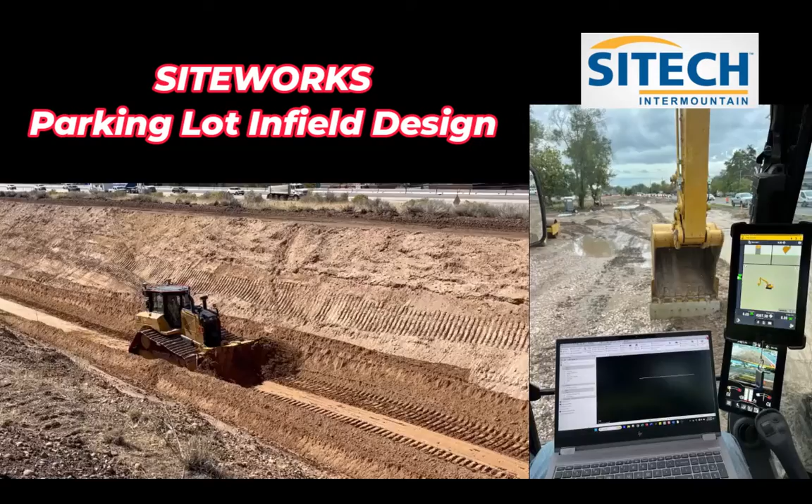Today we're going to simulate an infield design of this parking lot. We're going to go and shoot all the lips of curb and concrete and create a new surface for us to come in and grade this.

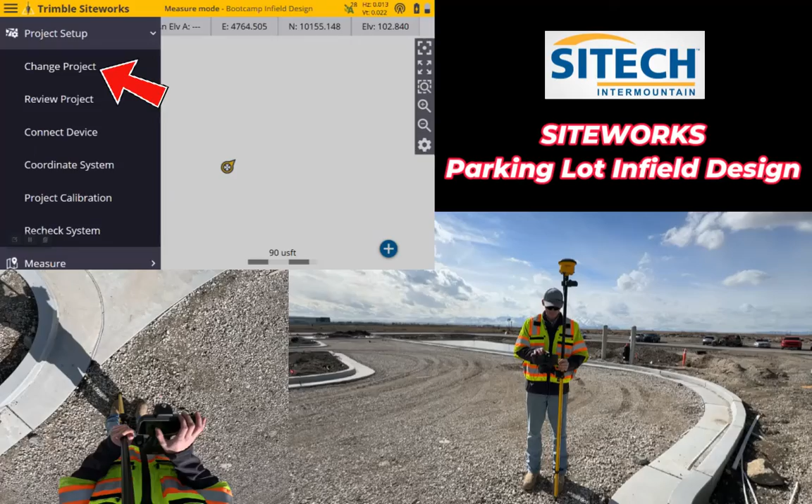So we'll start off by starting a new work order for this. I'll come up to my hamburger menu, under my project setup tab, change project. I've got this new work order called parking lot started. Hit accept on that, get that fired up.

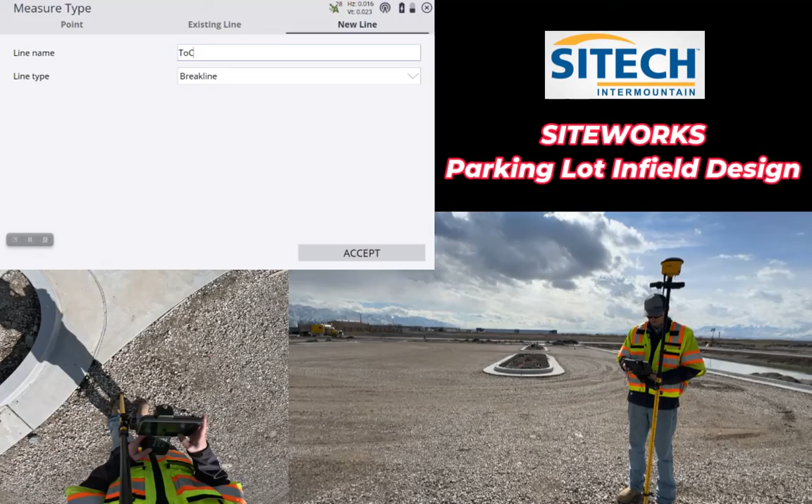Then I need to configure a new line string to start this on. So I'll go into my roller stuck in the mud icon here, switch over to a new line. I'm going to make sure that's a break line because I want that surface data to come in, and I'm just going to call this toe of curb, or TOC. Hit accept. Now I'm ready to start measuring that.

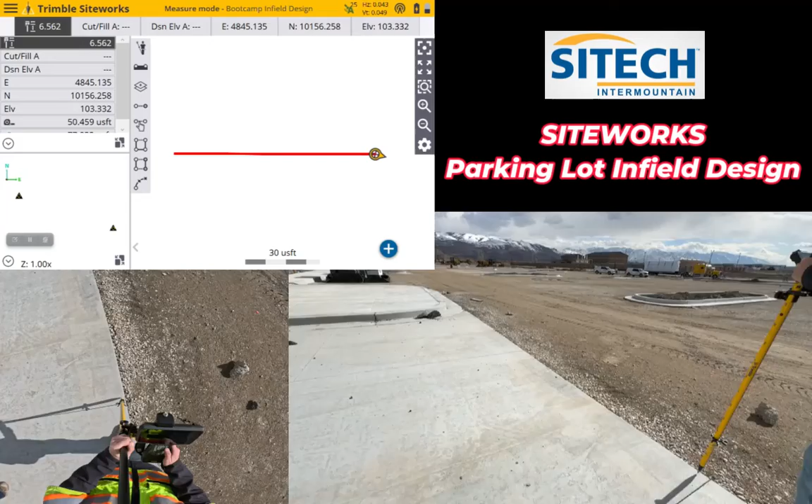So I'm going to square myself up over my bullseye here. Start right here on my concrete and start measuring this in. We want to hit every so often along this concrete edge. Anywhere we have any grade changes, especially along the curb line, if we've got grade breaks or grade changes, we want to make sure we shoot those in so our surface comes in as accurate as possible. This concrete right here is pretty flat, pretty smooth, consistent, so I'll go a pretty long distance. Get all the way down to where it meets up to this curb line.

I'm just going to continue measuring this same line out into my curb. Then I'm going to come up to this corner, make sure I get one at the start of my arc, one in the middle of my arc, maybe another one so it makes a nice good circle for us, and then back into my straight section, and then down here to my corner.

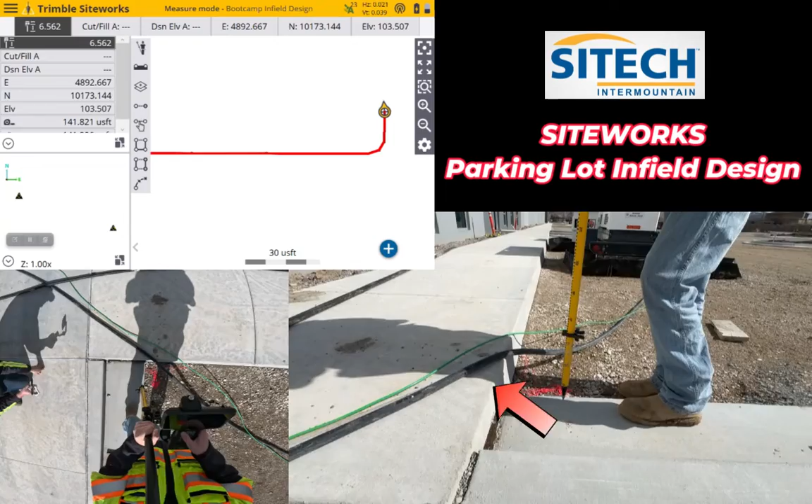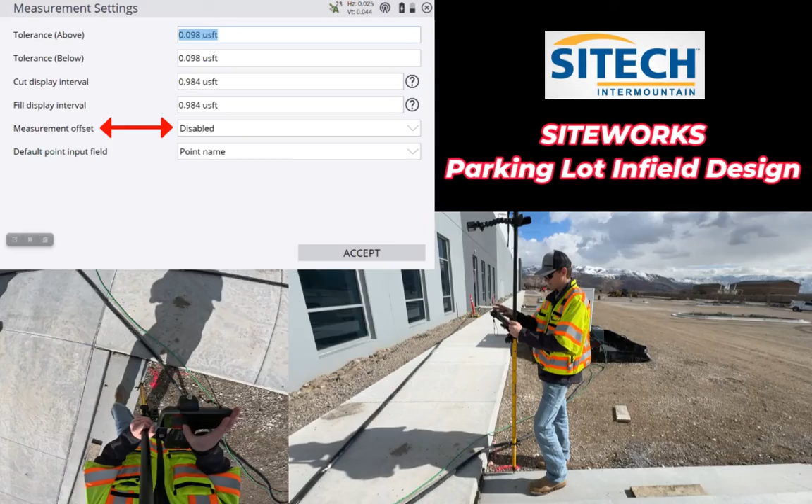Now you'll notice I have a 6-inch rise here to my sidewalk. I'm actually going to stop measuring this current line, menu, measure. I'm going to turn on a setting that gets turned off anytime we create a new work order - it's an elevation offset. To turn it back on, I'll hit my menu, come down to settings. Under settings we've got two measure settings, but we've got measure mode and then another one that just says measure. The second option from the bottom, this measurement offset, is disabled. We just need to enable that, hit accept.

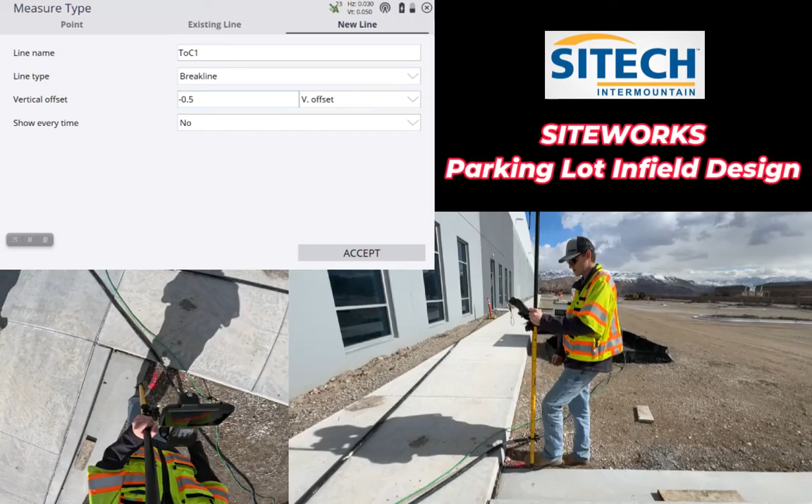Then I'm going to come back into my roller stuck in the mud icon, and you'll notice I have a vertical offset option in here now. So I'm going to do a minus 6 inches, a negative 0.5, because I've got a 6-inch show here. I'm going to hit accept on this new line, and I'm actually going to measure on the top of the concrete up here, but it's going to move my elevation 6 inches lower so it matches my curb line. So I'm going to start this line string here, measure all the way across.

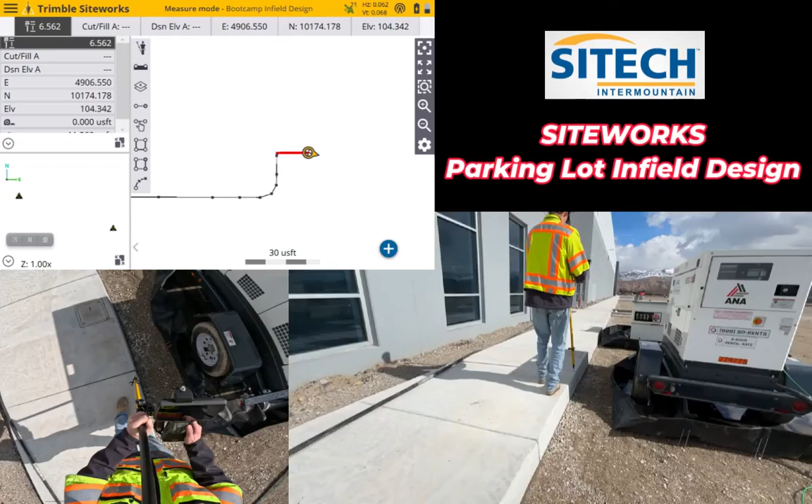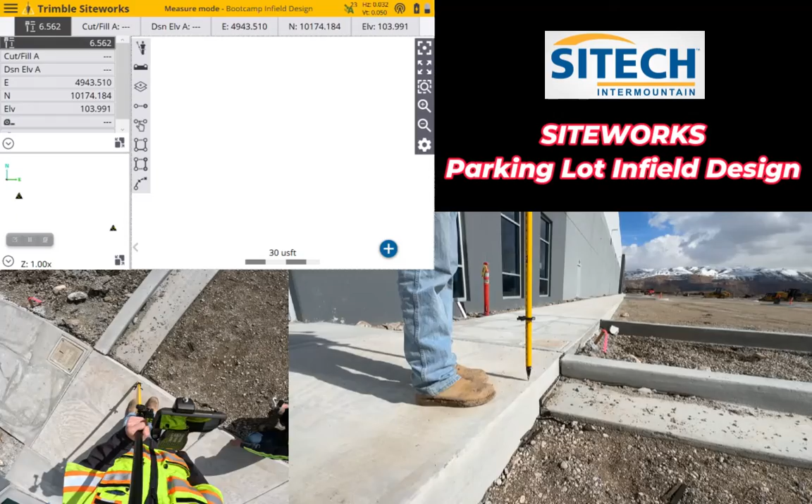Measure all the way across to this other curb where I want it to meet up again, take another shot just here, and I'm going to stop measuring that line. Again, menu, measure. I'm going to come back into my rod stuck in the mud icon and want to set that vertical offset back to 0 so that when I'm measuring this curb line it doesn't add an extra 6 inches to it that I don't want. So set that back to 0. I'm going to step down to my lip of curb and go ahead and start measuring all this in.

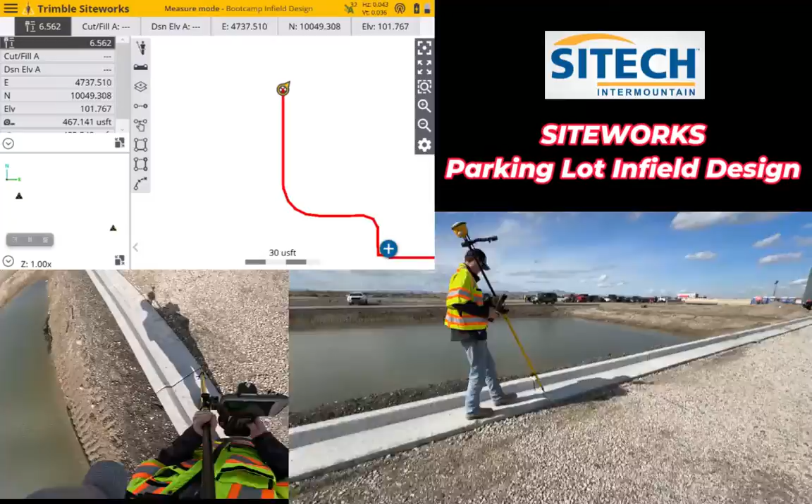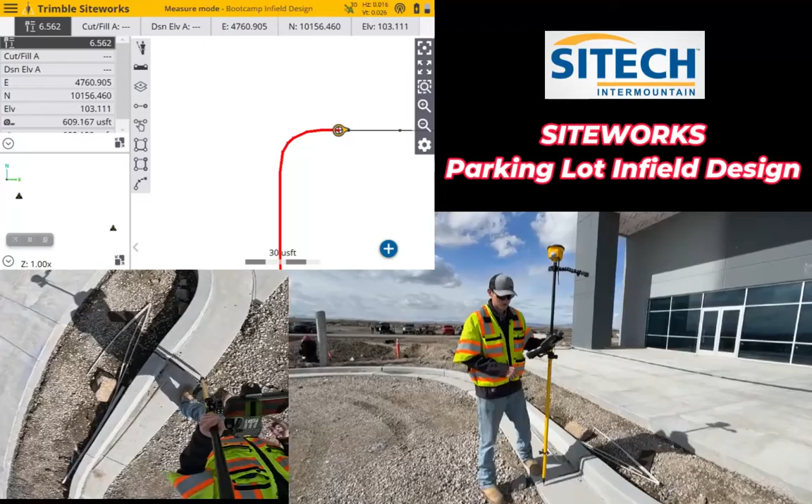Okay, so now that I'm back to where I started, I don't want to take another shot that would overlap this one - that would be two different elevations potentially. So I finished up this outer edge. I'm just going to stop measuring this line.

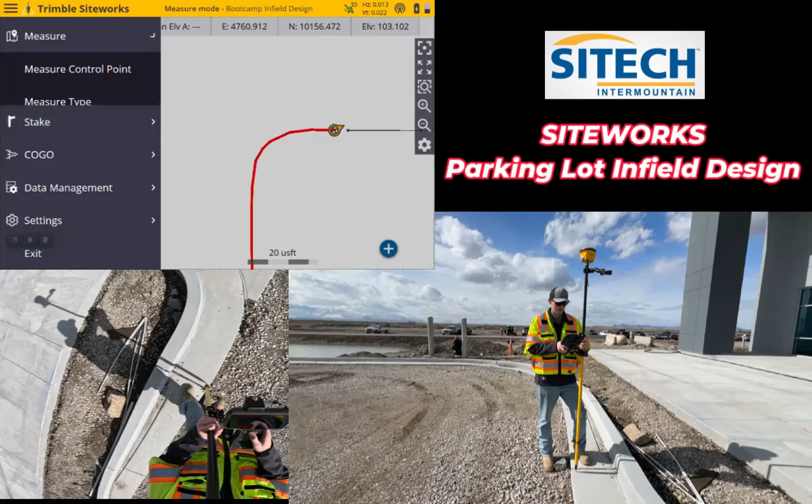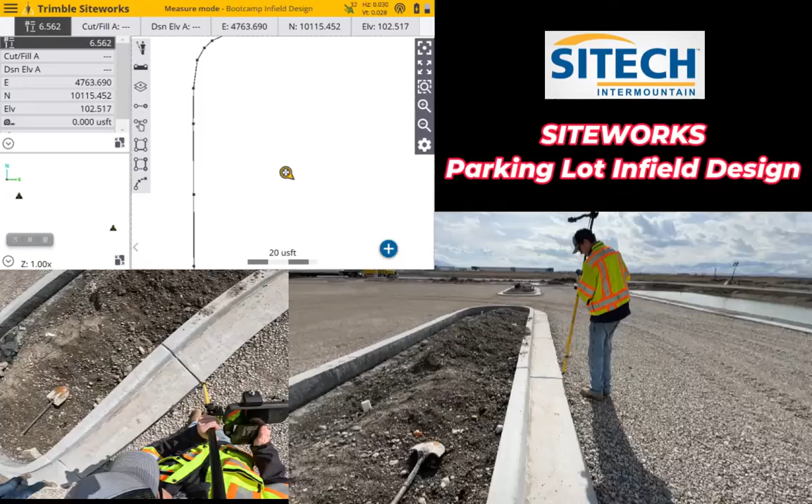Menu, measure. I'm going to leave it as a break line, and I'm going to immediately jump into these islands and start measuring these in. So I'm just going to start from this inside edge, and I'm going to start a new break line again. We can have it named the same thing, toe of concrete, toe of curb. Make sure it's a break line, and I'm going to start measuring this in.

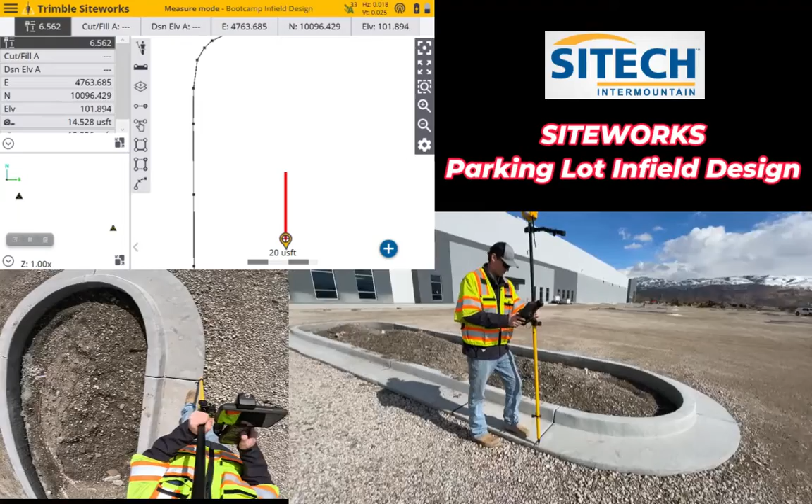These straighter sections, as long as they don't have a bigger grade break, we can jump pretty far. But these rounded edges, we want to be really precise about getting a couple of shots through the radius so that it comes in nice.

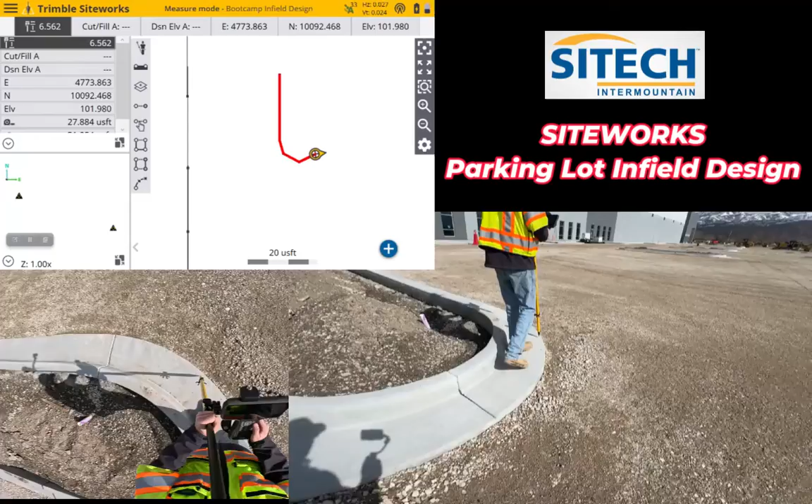And back into the straight section. I can stretch out these measurements a little bit more.

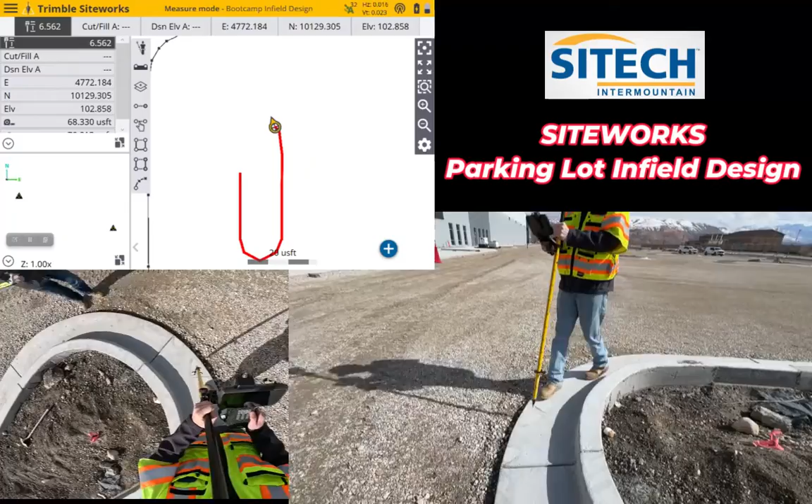And then I'm going to take one right as my arc starts. Maybe one in the middle of my arc. Maybe up to my joint. Middle of my arc again. And then back down to my straightaway.

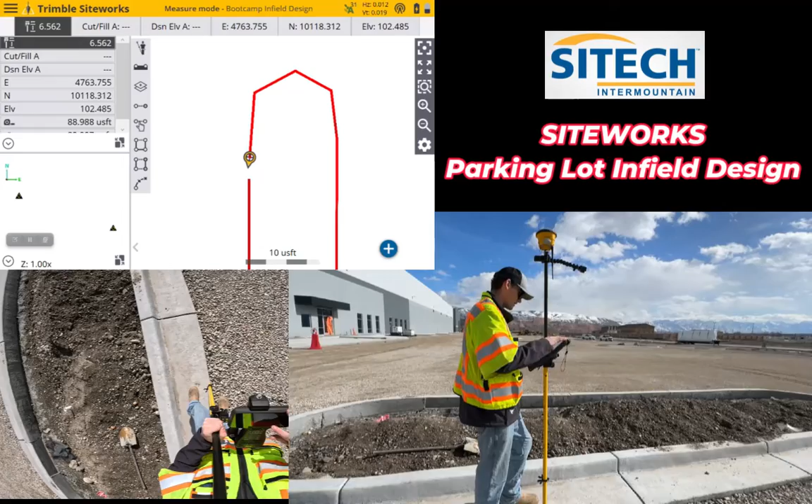Now I don't want to overlap these two points, so I'm going to use this little icon on this gray taskbar. It's the third item from the bottom, the second square up. It's got three solid lines and a dotted line across the top, and that's going to close out from where I finished to where I started.

So now I have a solid loop. So now I'm going to go around and apply that same thing and get the rest of these islands in.

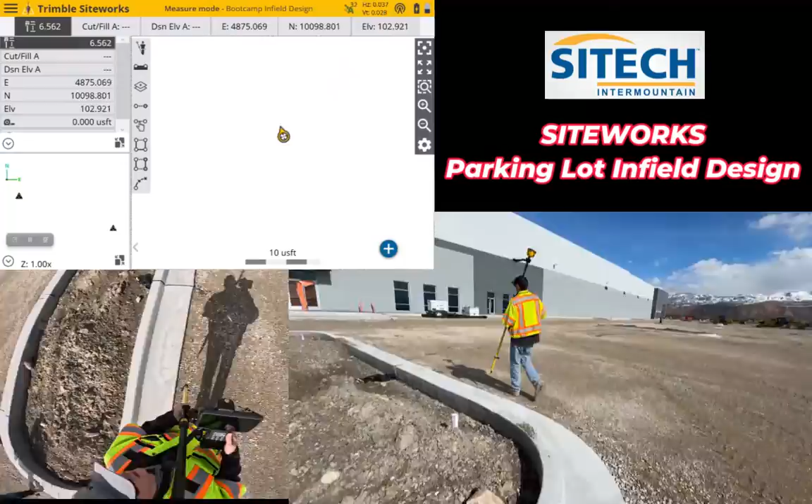So in a lot of cases in the real world, we'll have drain boxes, grade breaks that need to happen and cross our parking lots. In this case, we just have a big giant sheet drain that's going down to our catch curb. But we're going to simulate on a job site that would have a drain box.

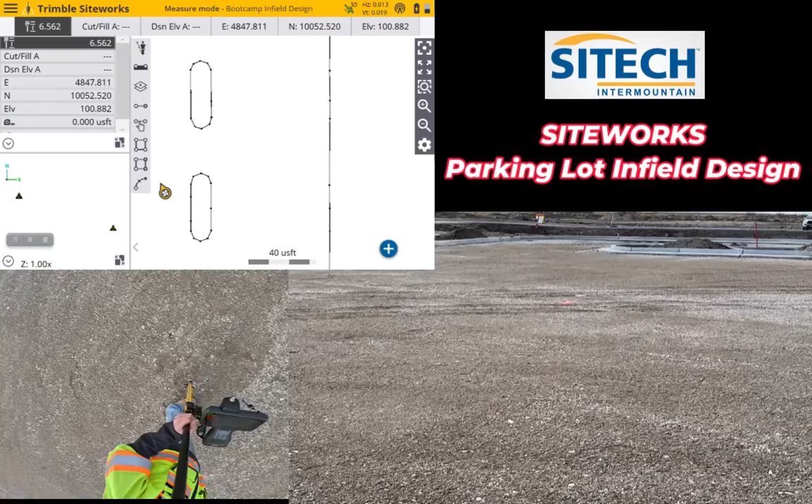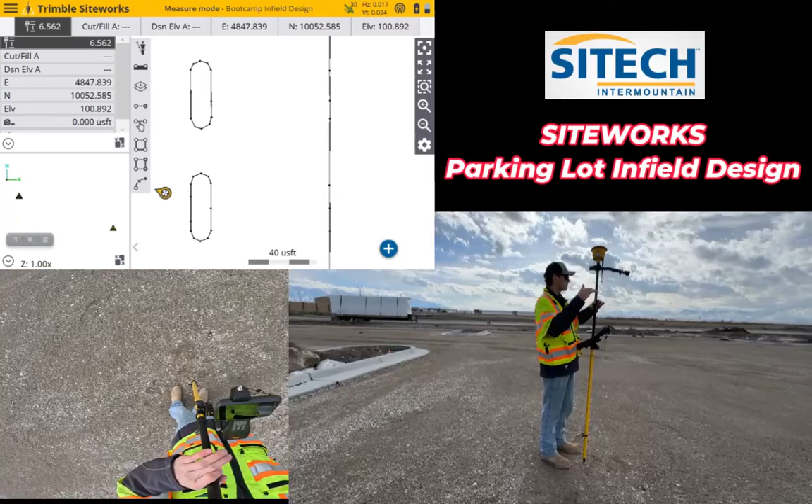We're going to utilize these stakes here as our drain box and flow from these spill curbs in the island. So I'm going to shoot a new break line from the concrete to my drain box back up to my concrete. And if we had multiple corners that needed to flow into this drain box, we could do the same thing by tying break lines to those corners of that drain box.

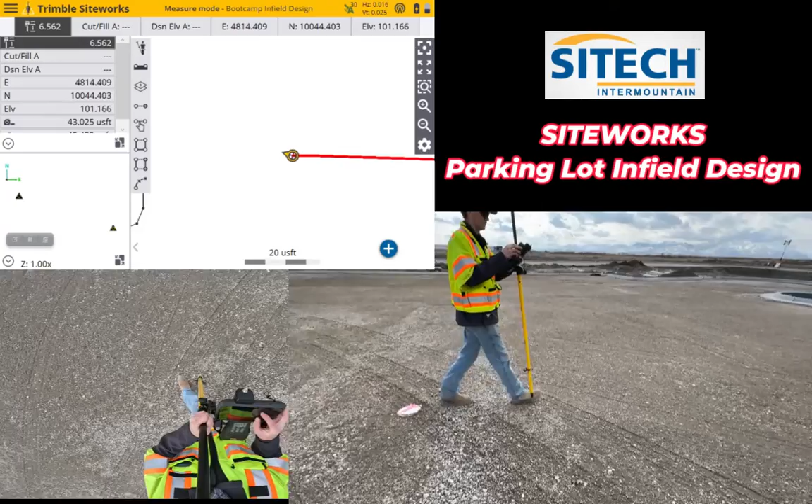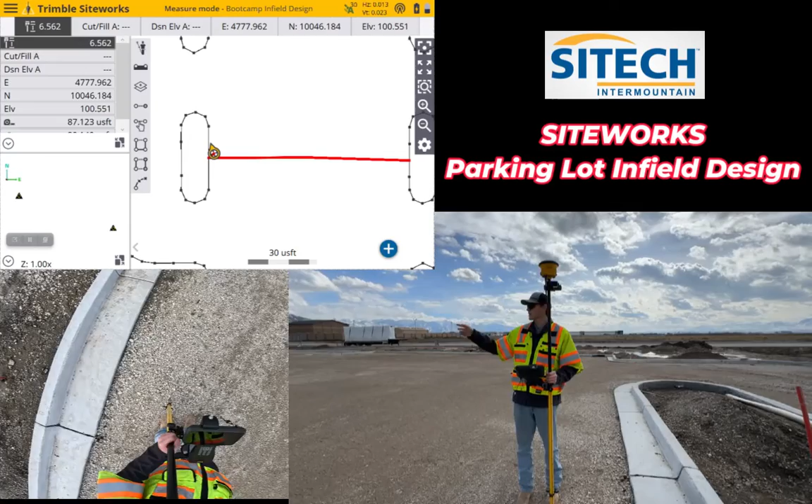So we finished up using break lines to measure in our outer edge on our concrete where it's going to be spilling from. We've shot all of our islands in to make sure that those get calculated in. We've simulated having a drain box in the center of our job site where we needed to bring break lines, grade breaks, to that certain position.

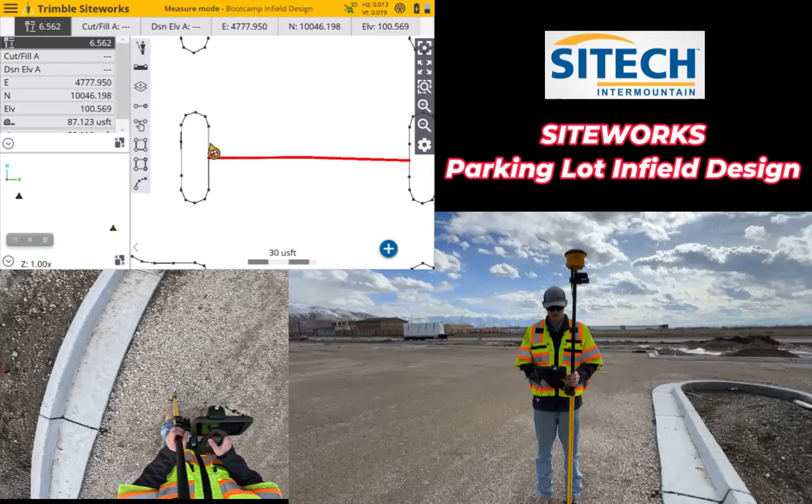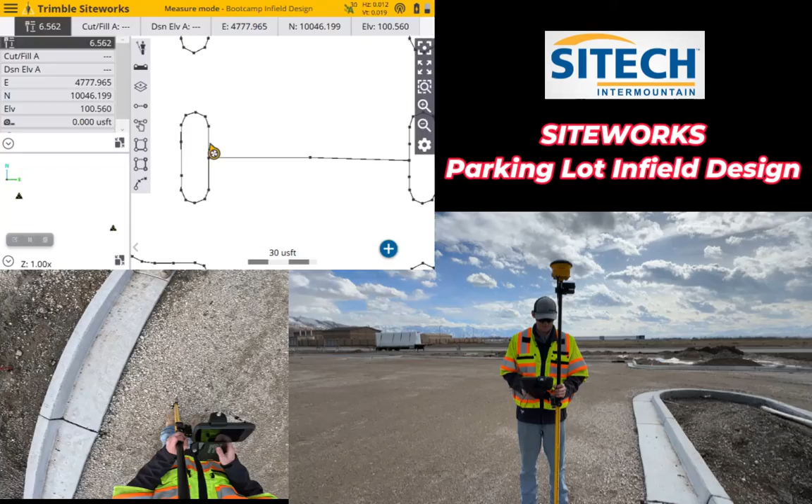Now all that's left is we just need to save this as a new design and create a surface out of it. So I'm going to go menu, measure again to stop measuring this current line. And then I'm going to come back to my menu and go down to the Data Management tab. Under Data Management, I have an item called Save as Design.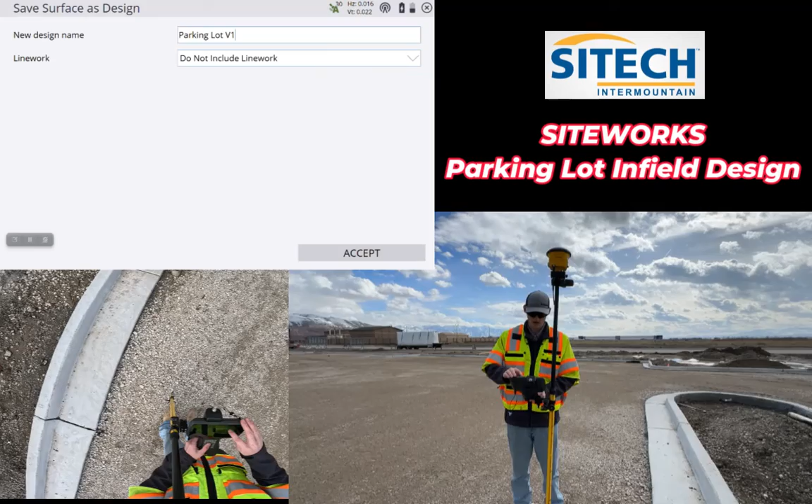In here, I can give it a new design name, so I'm going to call this my parking lot version 1, in case I need to make changes in the future. This drop down for do not include line work, I'm going to make sure I select include measured line work and hit accept. And then I'm going to use outermost points in this case and hit accept.

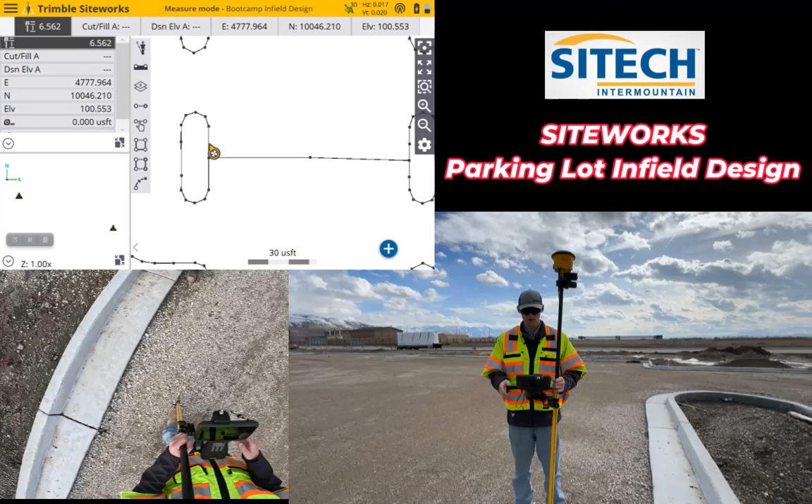So I've saved that as a design. It's just not quite yet loaded on the screen. So I'll go back into the menu, up to Project Setup, under Change Project, and now under the Design tab I have a new parking lot version 1 that I just created. Hit accept and get that loaded up.

And now I can go around and check my cut fills. So I can select this drop down menu in the bottom corner and change that to a cut fill light bar. And now my data collector will beep at me like a laser will. Slow beep, fast beep, and a solid tone for zero.

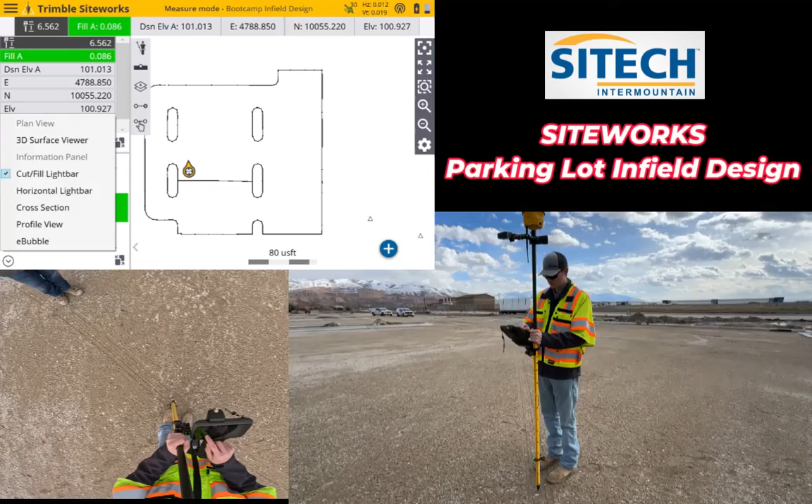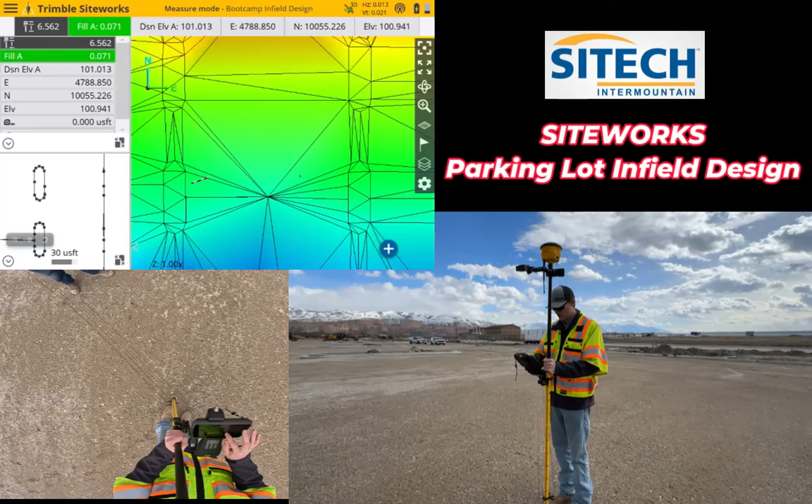The other thing to view is the 3D surface view. I'm going to hit this black icon in the bottom right hand corner and flop that out to the main screen. And you can see those digital string lines and how they triangulated on our job site. If I hit this globe icon on the side, I can rotate this in a 3-dimensional view and view how my water is going to be draining across my entire parking lot.

So I've gone around my job site and I've checked a couple of grades to understand my material. Now this data that we've created can be exported to our machine utilizing a thumb drive. So when I have the design loaded on my data collector, I can plug my thumb drive into the bottom here. On this TSC7, it's in the bottom left here.

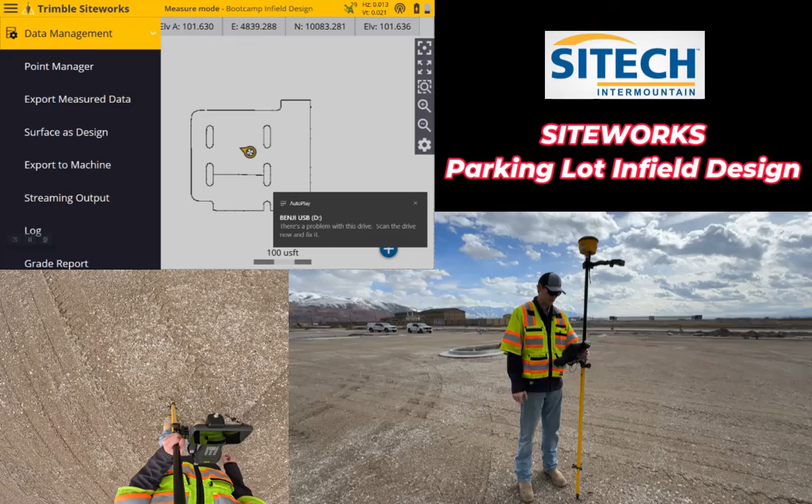And then I'm going to go Menu and go down to that same Data Management tab where we did Surface as Design. There's another item in there that says Export to Machine. So I'll do Export Data for Machine. I'm going to change the export data type to Design. That way it brings over the line work and the surface data.

And then it's all down to what machine control device am I going to. Most things are Earthworks now, but if we still run GCS 900, the button push, that's a CB450 460 export. So I'll switch to Earthworks. It's got my active design, that parking lot version 1. As long as my thumb drive is plugged in, I can hit accept, and it's going to write that data right to my thumb drive.

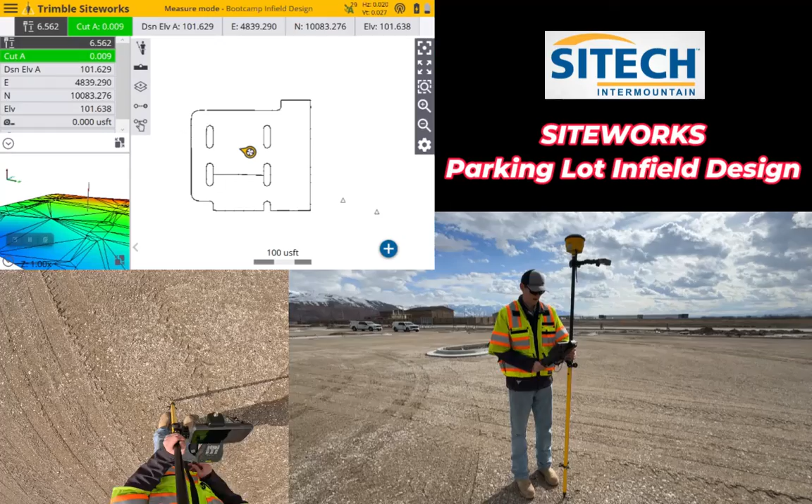So it saved the data to my thumb drive. I'm just going to hit OK on this, pull my thumb drive out. This is ready to go in the machine and we're ready to start grading.